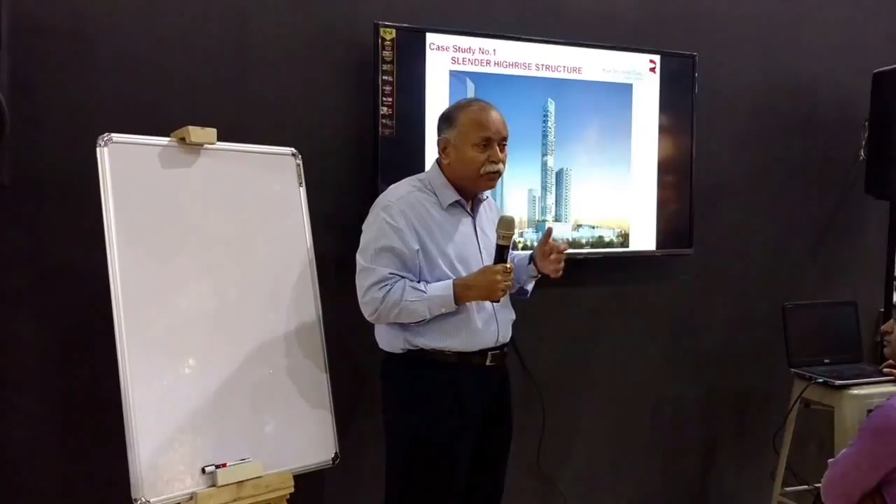So here is one of the structures that I had faced and still I am facing, because this structure is a redevelopment structure of about 180 members at Shivaji Park, behind the Shiv Sena Bhavan, where the patra is still there and no work is yet carried out. What is the problem? When we designed the structure first, it had two wings, the ground floor plus 69 upper floors, having a total vertical height of 240 meters, and a sail building having about 45 floors. As I told you, the structural configuration was a major hurdle.

When we designed this particular structure, there was a foreign architect involved. And when he sent the drawings from there, what we observed is that there were only 4 columns internally and all the vertical columns were totally floating. Now imagine a building of 70 stories, hardly 4 columns in the lower area and rest of the columns all floating. What will happen during earthquake? The whole system will start dancing immediately. So that was the first problem.

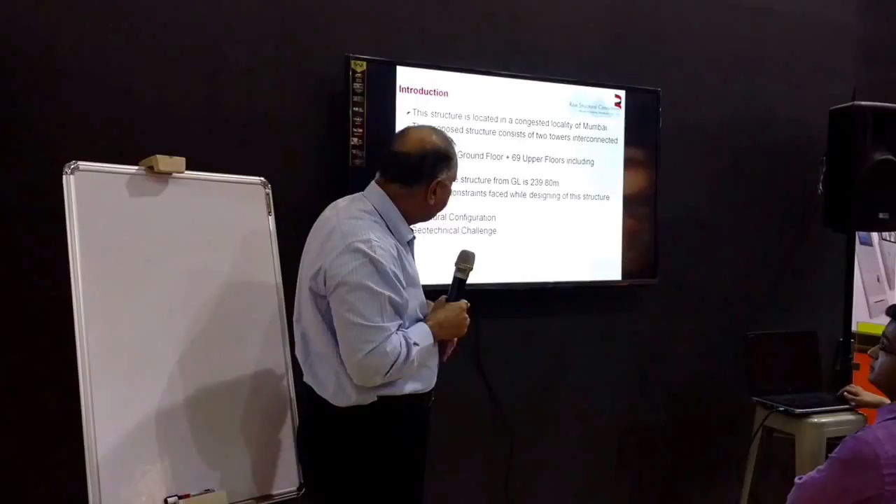The second problem was what? Geotechnical investigation. The unfortunate part today in the geotechnical investigation is that you start getting cut-paste reports. The bearing capacity, the data that has been given to you, all confuses you. We were given allowable end bearing of 300 ton per meter square. Skin friction was given 15 ton per meter square. Settlement was given and the socket length was given.

On this particular basis, I told the foreign architect that it is difficult for me to design a building of this type and I am ready to quit the job. So he said, no, I am coming to India and will sit. The biggest positive approach from him was that when we discussed with him, sir, how can I get all my columns floating over here?

How? Then he said, no, I have already constructed in this country, in that country, in so many foreign countries. So we said, okay, you give us any example, let us go over there and see it. If you really have constructed it, then something is wrong with me. But then after about half an hour, he says, no, sir, we have not constructed this, but we are daring it in India. Coming from foreign, daring it in India.

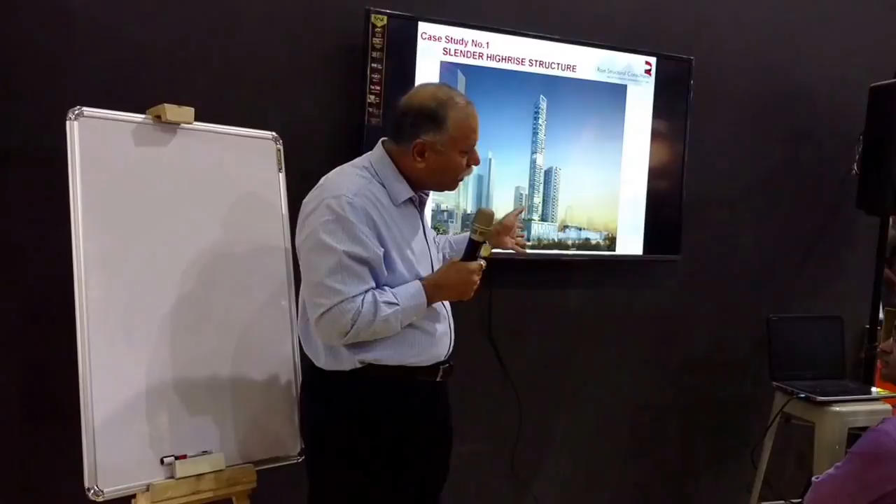So when they were to dare this, I said, in that case, if you are daring it, sir, our life will be in miserable condition. So why not sit together? Approach was very positive. Because when we sit with the architects, we have a lot of restrictions. We want to design as per their artistic views, but we are so restricted to our structural designing that they say, if you are not ready to do it, sir, another consultant is ready to do it. That is how they start putting it in front of us. This foreign architect said, no, I am ready to sit with you. And after sitting there, we came up with a configuration document.

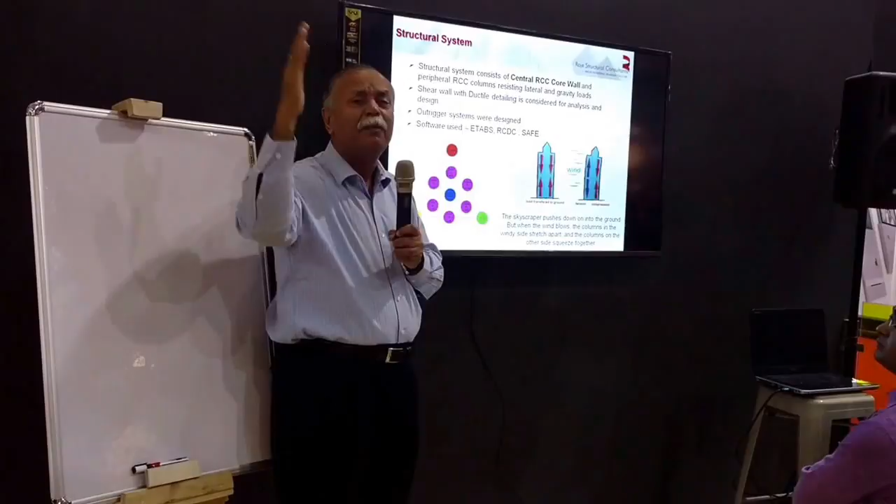So imagine this area, this is the Shivaji Park area, and this is a particular zone. The worst zone is that this is the Sena Tower over here, this is the Kohinoor Tower over here, and in this particular part you have to construct a building. The slenderness ratio of this building was somewhere around 14. Therefore, if you see the main picture, it is literally like a coconut tree. And just imagine, in very local language, when the wind pressure is there, what will happen to your coconut tree? It will start swaying in both directions. And this is exactly what was happening to this structure.

So when we observed that there was a major sway in this structure, it is he who gave me the idea, why don't you go for outriggers? This is the first concept that he put forward to us, we studied it thoroughly, and we came with the concept of outriggers. So in the main core, we placed the outriggers. The idea of the outriggers was that they transfer the load in axial form to the end columns, and therefore the sway is reduced. So that is how he helped us, and we accepted that help. I will be explaining to you the sway part and the outrigger part. Before that, let us run through this.

We designed this structure for gravity loads, earthquake loads and wind loads. These are the various conditions that we have accepted. This was the total loading taken into consideration, this was the earthquake zone factor, and this was the velocity of the wind taken into consideration. Now come to the structure. This structure is 70 stories. Imagine the least lateral dimension to the vertical height. Just imagine the slenderness ratio. And initially, there were only 2 or 4 columns and the rest was floating.

Now if you see this structure, after sitting with him, see how beautifully he has brought it into picture. He brought all these shear walls. And in the front side, because shops were there, at the end we placed 2 main columns, and then there was a clear-cut frontage opening. This frontage opening was easily catered by us, and that is how we maintained this structure. Now if you see this structural configuration in the whole structure, these are the main walls that are going right up to the top level.

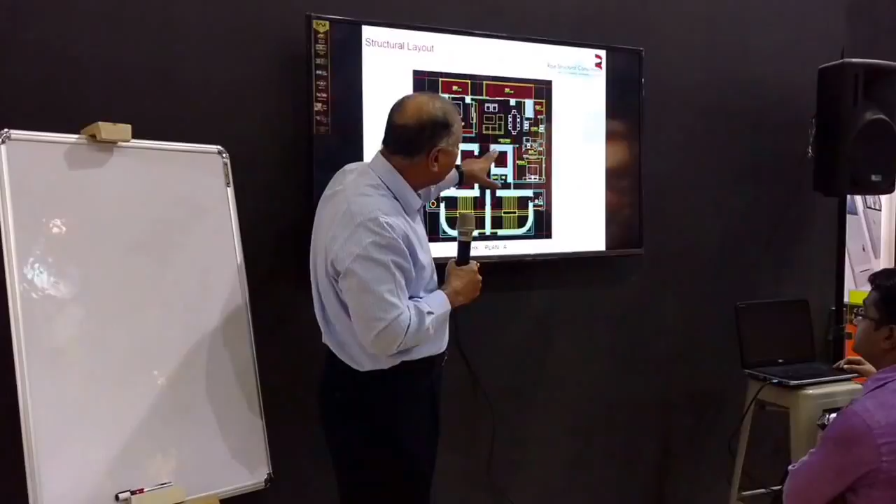We had these about 450 to 600 thickness walls. Initially, this design was complete, sent to the high-rise committee, accepted. But let us see what happened afterwards. So this is a particular ETABS model of that. You can imagine how that coconut tree is standing over there.

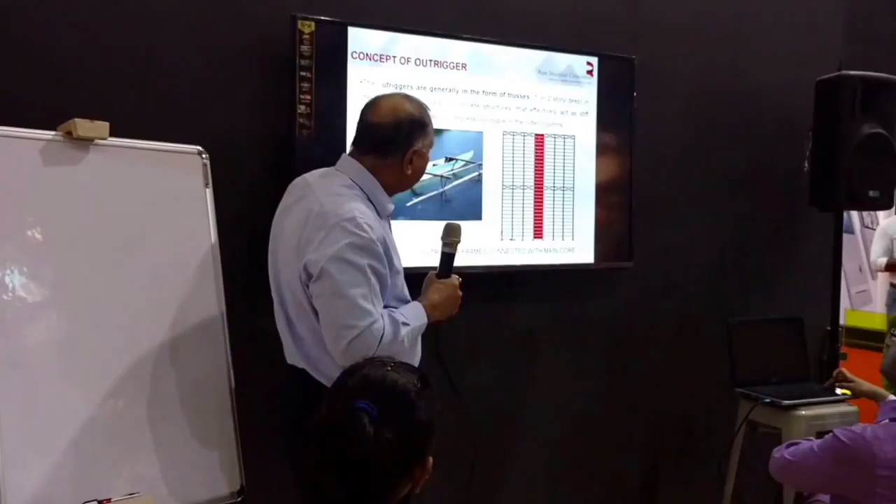Next. This is the sail building. Sail building had a little bit of stiffness also. Now let us see this particular structure. What I mean to say is that when we have this type of slender structures, if you start having torsional motion of this particular nature, the building is going to definitely collapse. So look at this particular structure. When we had certain columns configuration, this will literally twist.

So what we did is that, this was the outrigger system. What is an outrigger? Basically, if you see a boat and if there are waves in this particular part of it, the boatman has got two side supports. He takes one support, he takes the second support, and then he passes that particular load axially. Same configuration has been done in this particular high-rise tower.

These are the configurations for these particular systems. How the load and the movements are transferred has been explained over here. So what we did is that we had the outrigger on the 20th floor and 21st floor, and we had outrigger on 40th and 41st floor. Now when we had this particular system,

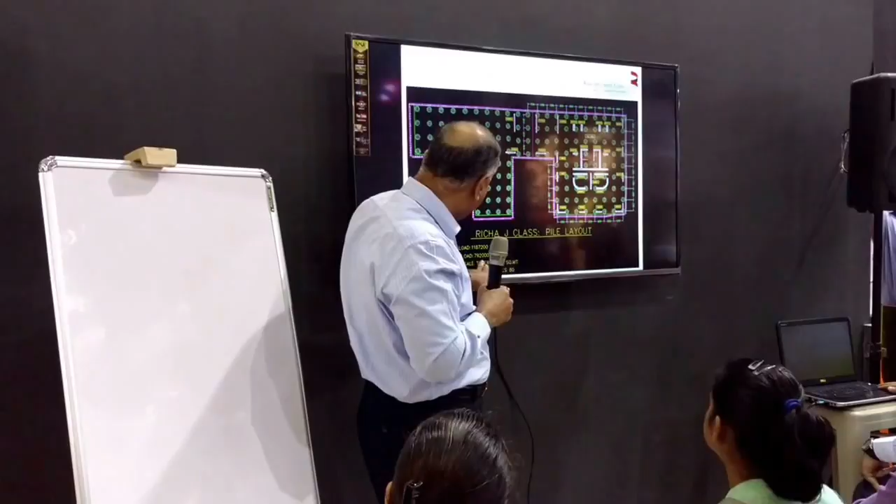This is the piling system that we had. We had a load of about 7,920 tons. The design load was about 11,87,000 tons. Number of piles was there. You can see how this system was done as a Rangoli type of system.

What happened further is that metro came, and the metro had a tunnel which was very close to our building. So they put the first condition that your piles cannot go for 18 meters. You excavate up to 9 meters and have a shear wall in front of the metro, and then you can do the construction.

Once again, the complete soil investigation was carried out to understand what best can be done. So when we carried out different more tests, what we found is that the skin friction was now increased to 20 ton per meter square, and we could trace out the rock at about 9 meters, which was having an SBC of about 500 ton per meter square.

But that rock had fissures. So since that rock had fissures, the petrographic part of it was clearly indicating that a lot of fissures were there. So we had to do a survey, we had to do a research type of work where we injected certain grouts to thicken that particular mass so that it becomes a solid mass.

So on that particular basis, if you see, this is the tunnel top, this is the ground level, this was the building's bottom, and they said that if our tunnel is going next to you, you are not supposed to go for the piles. So we changed the system. What we did is that we removed the piles completely.

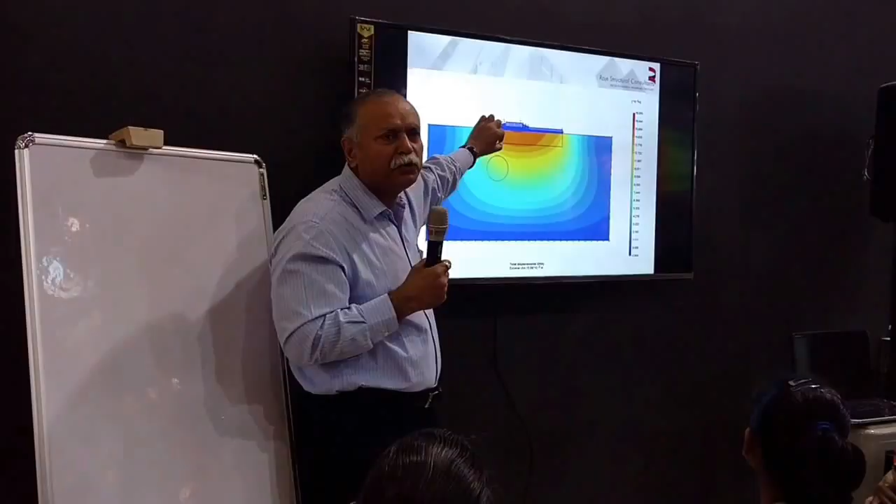And when we loaded this particular area, for whatever displacements are occurring, we observed on this particular tunnel where exactly the maximum displacement is taking place. Idea behind that is that when the tunnel goes below that, it is not going to be damaged, neither the displacement is going to affect our structure. So this was placed in front of them. There were foreigners who were observing this.

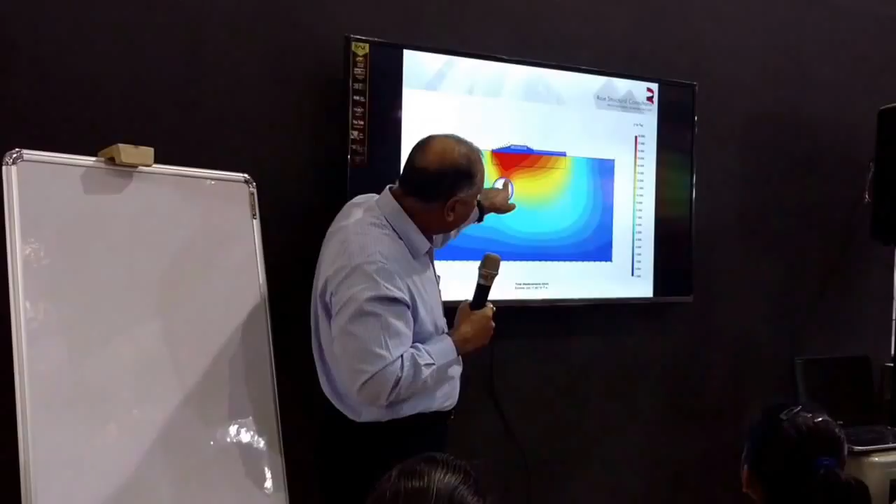Then again, we showed them, if your tunnel is there, what is going to happen to your stress levels in that tunnel area also. You can see how the curvatures, how the deflections, how the deformations have been indicated over there. Then the effective mean stress, they wanted the effective mean stress, so we worked out for that also. You can see how the stress concentration was taking place at the two edges, because naturally when you have a vertical shaft of this type, what may happen? So we overcame that and showed them that this also is effectively acceptable.

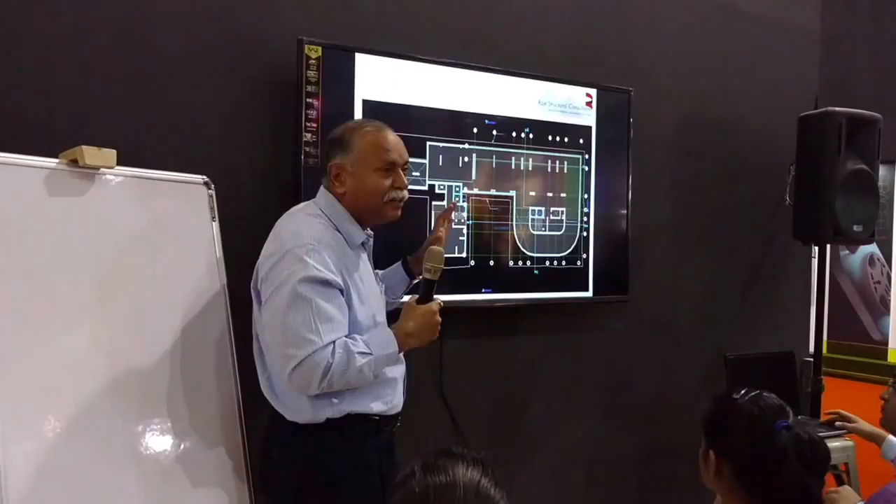After doing all these things, after accepting that, there was again a change. This was accepted, the structure was to be constructed. We finished everything, and then once again a change came, and the change was that they said, we are not allowing you that excavation. Because their tunnel was at 18 meters, you put your shear wall, put your piles up to 31 meters, compulsorily.

You imagine 31 meters, 1200 millimeter diameter pile was a very difficult job. It is going on now, but you always find that the machine's axle breaks. Then in the internal part of it, they insisted that your slope should be such that it will continuously have a gradual gradient.

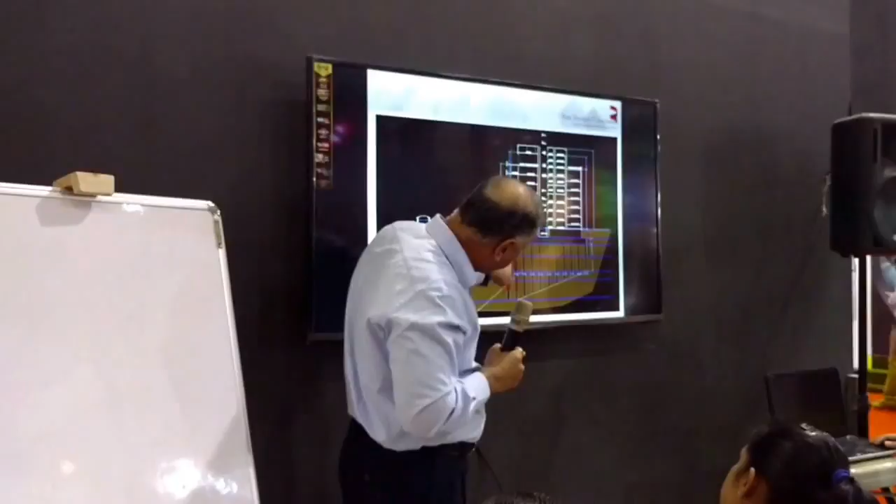Now this was the new design which was accepted. This is how the piling was done. And now you can see this is the metro. This is the metro level, and now they wanted that this should be the shear wall, and thereafter you have these particular piles in this particular direction.

If you observe properly, a huge amount of problems take place in Bombay for redevelopment. Usually when you go for redevelopment, many of the projects get stalled halfway. People really don't know why the projects are getting stalled halfway. They are getting stalled because suddenly the metro line is coming next to you, and if the metro line is coming, you have so many formalities to be completed and so much checking to be done.

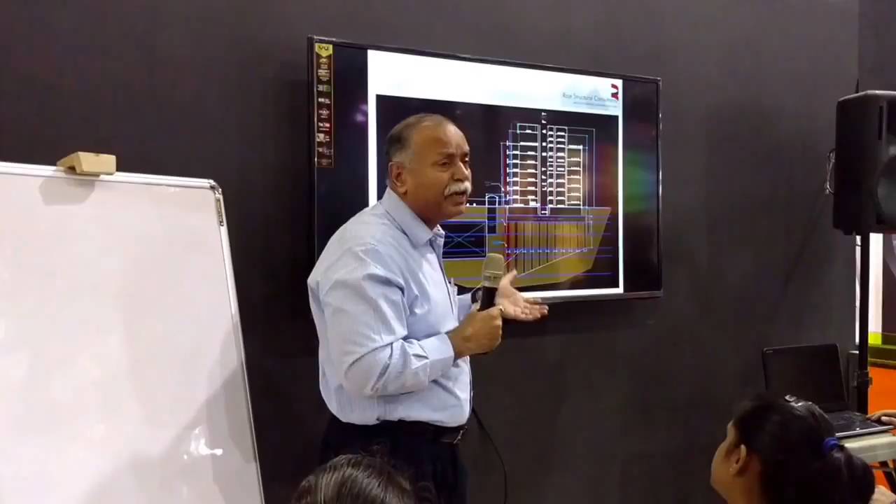For a structural engineer, you need to have clear-cut knowledge of soil as well as structure, and the parameters have to be placed in such a way that everything is crystal clear. So these are the problems you have to face when constructing a multi-story high-rise tower.

In high-rise structures, there are many things to be looked after by the structural engineer: if a floating column system is there, what is going to happen? What sort of cement are you going to use? What grade of concrete? Because the grade of concrete over there is 75, so imagine the control you have to do for that M75 concrete. Apart from that, a lot of research is going on for corrosion-resistant cement, for these high-rise structures if they are not maintained properly.

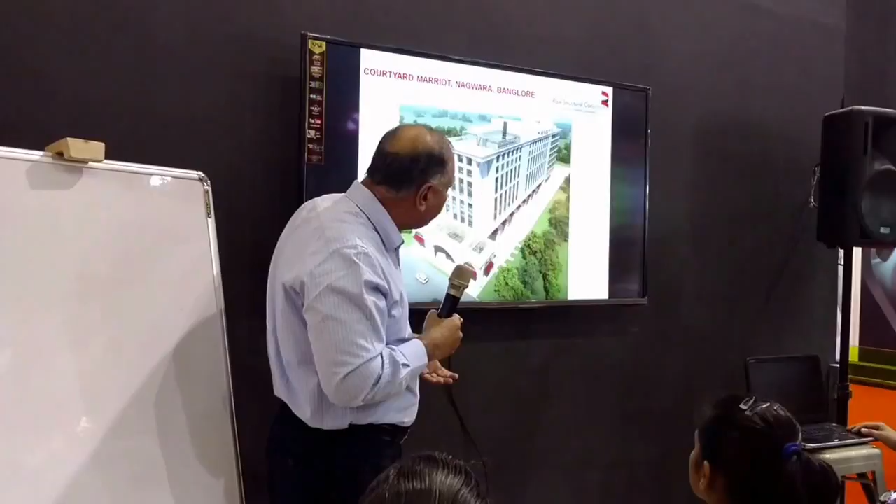This is another structure we have completed in Bangalore, and another high-rise we have completed in Padubidri. We are doing a huge amount of work across the country. Myself being from the teaching side, I am an ex-principal of an engineering college. We are doing work with research; it is not that we are just blindly doing calculations. This is the team, and with this team a lot of papers have been published nationally as well as internationally on various types of structures, repairs, and technology.